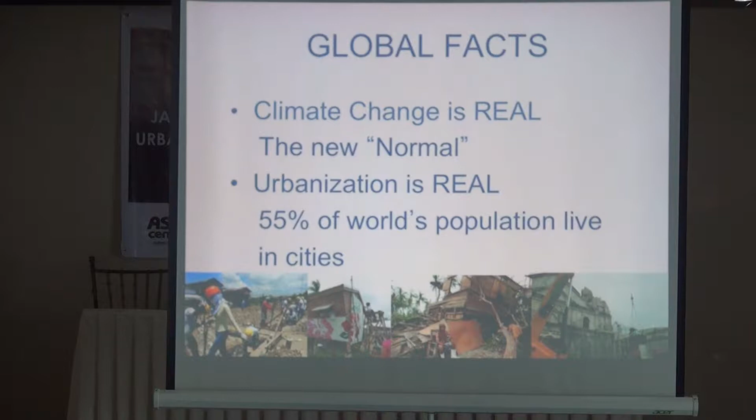What are the global facts? Climate change is real. This is the new normal, and we see all these disasters happening all over. Urbanization is real. 55% of the world's population is now living in cities. The Philippines achieved that value in 2008. Now the figure is 64% of our population living in cities, and that is very critical because we have barely any planning in cities. That's the problem.

What is the current thinking? To solve urbanization, we have to control densification. This is the key to a sustained future. I was glad Professor Bauer also mentioned this, to densify cities, compact cities. And then there's this triple bottom line: people, places, and profit. Before, businessmen always thought about profit, never about people and building places for people. Now the current thinking is building places for people, not only for business and profit.

What are the objectives of the Green Loop? First was to bring back legibility of the city by connecting major land uses. I'll show you a map later where these major land uses are—they already exist, and all we have to do is connect them. Similar to designing a house or building, like many of you here are architects, the building should be legible. When you go inside, you know exactly where the kitchen is, the living room, the bedrooms. It is legible. Similarly in cities, we have to make the city legible.

But how do we do that? Because of urbanization, Cebu is very different from Tacloban. The population is growing, the traffic is bad, there's flooding—there are a lot of urban problems now, but we are not addressing those problems. So this is one of the purposes of the Green Loop, to build back legibility.

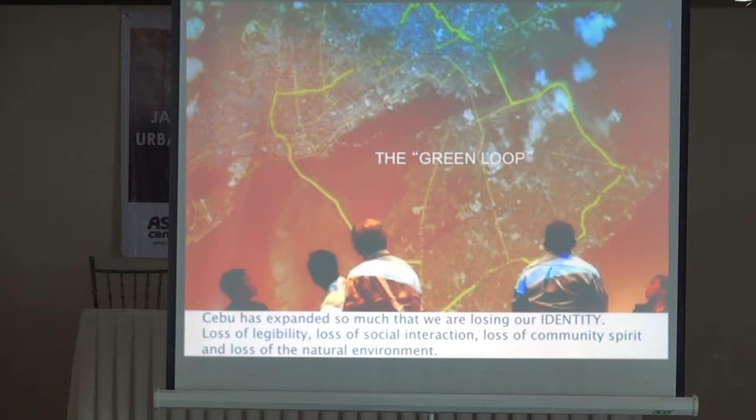So we are proposing a loop, but this loop is composed of segments, because you cannot walk all 42 kilometers of the loop. Instead there are packed segments, about 300 to 400 meters in length, that are connected along the loop and connect to major land uses along the city.

Now these are the rivers that we will pass: the Butuanon River in Mandaue, the Guadalupe River in the south in Cebu, and the Pilipog River in Cordoba and Lapu-Lapu. This Lapu-Lapu City in Mactan and Cordoba municipality in Mactan—the green loop passes through all of that.

What is important in this slide is we have the north-south arterial roads. As I said, development should be axial in Cebu, otherwise we will encroach on the mountain. So these roads are very important.

So we should designate—the problem with our roads is we designate them according to jurisdiction: city road, barangay road, national road. But in planning, that's absolutely useless, because we should identify our roads based on function.

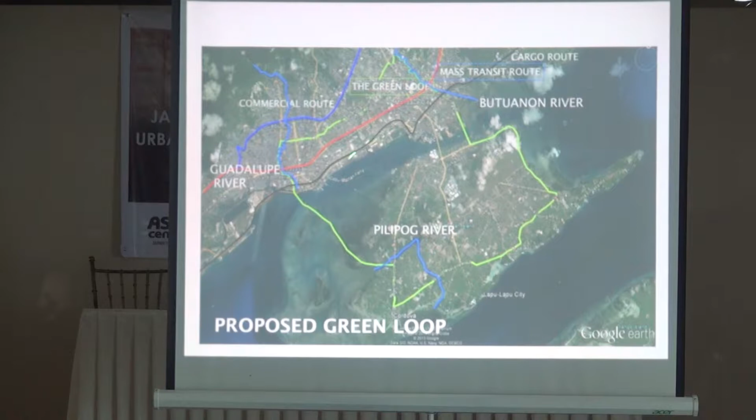If you look at this, the coastal road is the cargo route—that's its basic function, going through SRP to Mandaue. The red line should be a mass transit route, going all the way north to Bantayan and south to Santander. The blue line will be commercial and public, because a lot of subdivisions are along this route. And of course, the green line is the green loop, strategically located between the mass transit route and that private commercial route.

So these are the urban areas of Cebu, major land uses. Let me identify: this is the cultural and historic district where Santo Niño Cathedral and Plaza Independencia are, in Cebu City. Ayala Center and IT Park, if you're familiar, are becoming the trade and financial center of Cebu.

Mandaue's vision is high-end manufacturing, and we are proposing a design and creative hub, because Cebu cannot compete with areas like Calabarzon, which have very wide manufacturing areas. Cebu has the talent in creativity, so we try to introduce design and creativity.

University of San Carlos is in this area. The high-end manufacturing, like furniture, is in this area—a lot of home furnishings are being done here. So this becomes a high-end manufacturing area, which is the vision of Mandaue.

Lapu-Lapu is the tourist resort area, which still exists, and probably sports recreation. Finally, Cordoba—we want to preserve it for ecotourism and mangrove stands. It's important that we plant mangroves in this area.

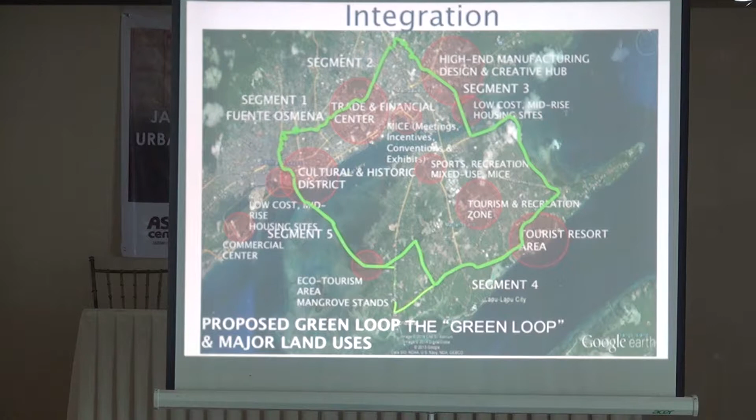Okay, so segment 1, I just talked about this in Cebu. We have this green loop around Mango Avenue area, and then this is the river, which is a linear park. And then it connects to the Cultural and Historic District. I told the cities, I was asked to talk about the green loop to the 4 cities, LGUs, and I told them they can make their own loops that connect to the green loop. So this is the heritage walk I am connecting.

So these are the 4 C's of livability: connected, compact, complete. But the bottom line in livability is the availability of choices - in terms of education, health, and of course mobility. So not only vehicles, but mass transit and pedestrianization, bike lanes and sidewalks.

So we have a lot of experience worldwide. This is the historic and cultural district. This is some model made by our SAFAD students for the historic district of Cebu. It's a loop from Colon Street here.

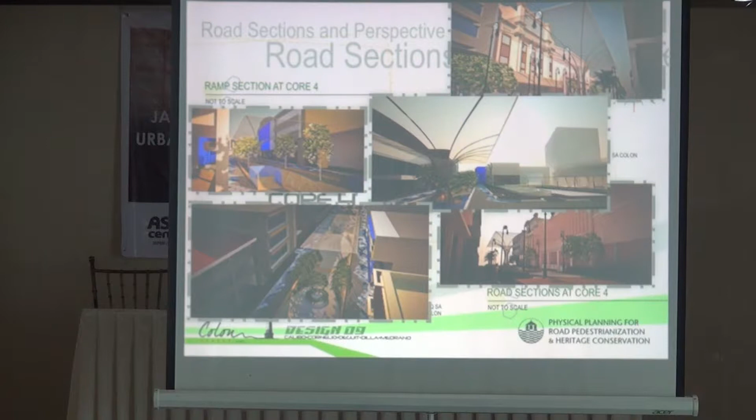The first street in the whole country is Colon, and now we are asked to pedestrianize Colon Street. And then those are the areas along the historic district of Cebu. That's the model where the mayor attended our presentation - that was actually in 2010 when he was still a new mayor. But it's only now that they're expanding to pedestrianization.

There are samples by our students - that's their perspective. And then these are the housing areas in the south of Cebu.

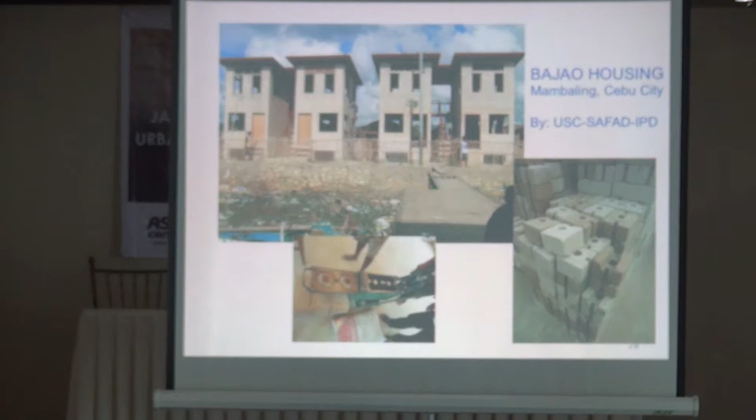This is Bajao housing made of compressed earth blocks, which I explained yesterday. And then this is the machine that we donated for the community, in the rural areas. This is in Bantayan up north. This is what we're doing.

This is in Lapu-Lapu. That is the proposed bridge to the Mactan area. We call it the Quincentennial Bridge - 500 years since the coming of Magellan in 2021, 6 years from now, but nobody is talking about it except us in the college. So why not build an iconic structure to commemorate the 500 years of the coming of the East and the West?

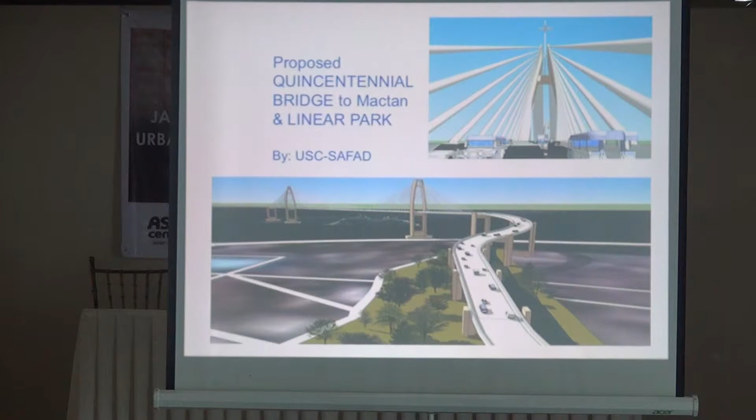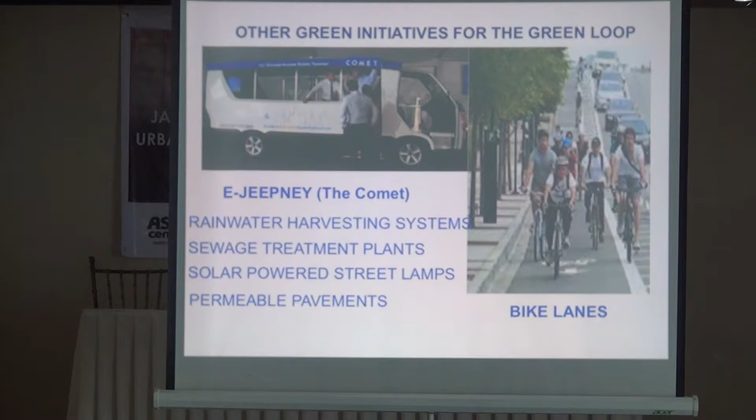Mass transit is the DOST road train - I wonder if you heard about it. And then the Japan AGT - Japan, the JICA, is proposing an AGT line from Mactan Airport to the city. So this can be another option.

And then this is important: 3 spheres of influence in the civic environment - government, private sector, and the community. Before, it used to be government and private sector working together, but now the community is very active. So all of this should come together.

That's the Mega Cebu vision. That's the Green Loop experiment we had last year. And then this is a slogan we are doing now, Cebu in 30 minutes. I hope it will bring back the identity of Cebu. So with that, thank you and good morning.

When you design a city for cars, it fails for everyone.

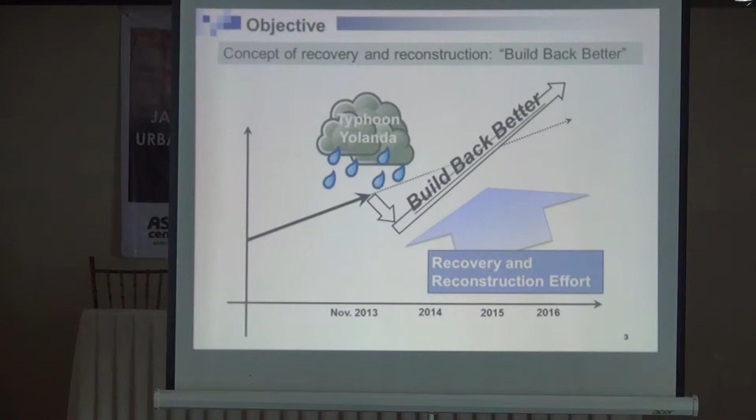This chart shows the approach of our project. To achieve Build Back Better, a comprehensive approach is very important. What is comprehensive approach? Firstly, we need to understand the current situation.

So we took the survey to understand the damage by structural storm surge and strong wind. Then we analyze the issues for recovery and reconstruction, and set a vision for the future and basic policies, discussing with Tacloban City and other LGUs.

Regarding the basic policy, we hold up 3 principles: building safer cities, recovery of people's daily life, as well as recovery of local economy. And then we support planning of comprehensive recovery and reconstruction so that GOP, Tacloban City and other LGUs can implement it.

For the comprehensive approach, we selected 2 focuses. One is to introduce our experience. Japan has much experience facing large-scale disasters like earthquakes and tsunamis as well as typhoons. So we introduced our experience in terms of not only technical aspects but also procedures.

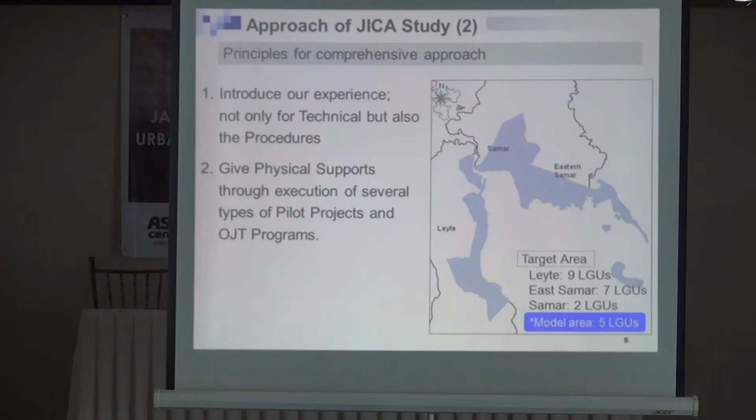Today, I want to focus on planning for building safer cities. In the afternoon, our member Mr. Uemura will explain technically about hazard maps, so I will skip this part. But hazard maps are very important to understand the hazard probability, inundation area, and inundation depth.

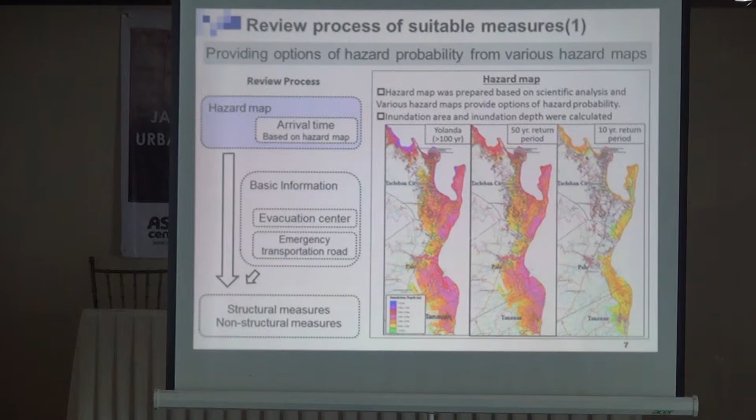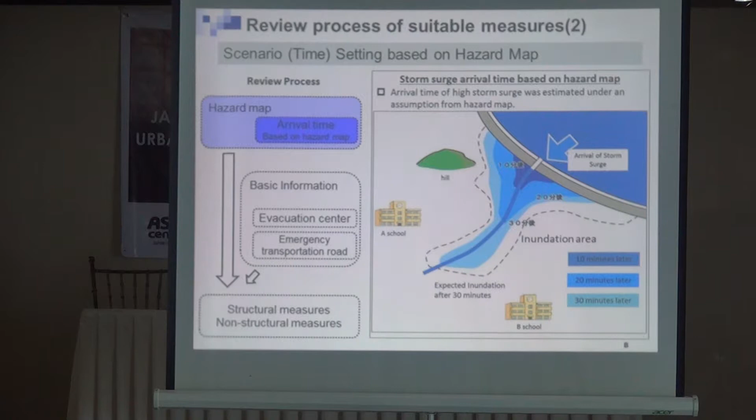Using this hazard map, we estimate the arrival time of high storm surge to each area. This information is especially important for evacuation. This is an example result of analysis of arrival time of storm surge, in the case of Basey municipality.

In this result, we can understand how many minutes people in this area have before being inundated, and how many minutes they have for evacuation.

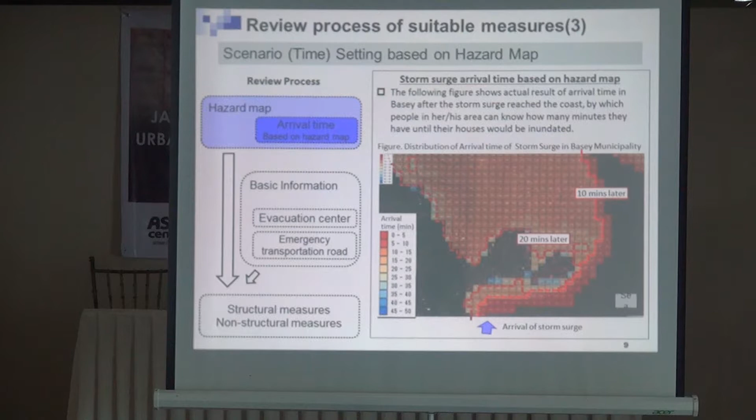Using the hazard map, we discussed and compared basic information like the evacuation center and emergency transportation road. Regarding evacuation centers, firstly we confirm the location. Some evacuation centers are in low risk areas, and some are in hazardous areas. If so, we need to think about changing the evacuation center for each barangay.

After that, we need to confirm the capacity of the evacuation center and the number of evacuees, the people who need to evacuate. This work is actually very tough and takes time. The LGU is still ongoing to get the information and data, and it's very hard to get enough capacity at evacuation centers for all residential people.

So we need to discuss using private buildings as evacuation centers, and this information should be updated and discussion should continue.

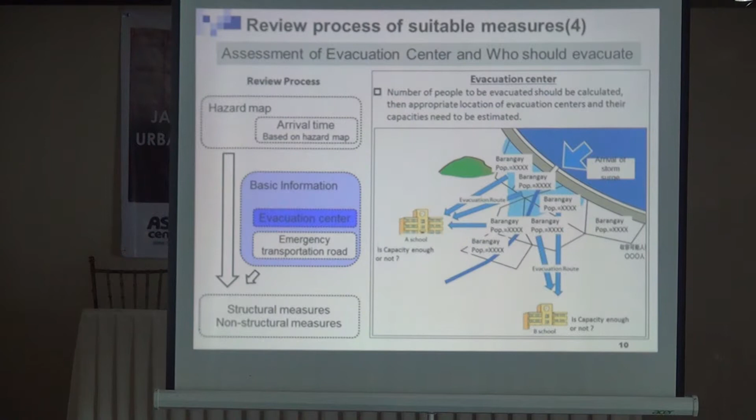The emergency transportation road also should be discussed. During disaster, if people try to evacuate using their vehicle, congestion happens. So in advance, we need to confirm the evacuation transportation route, and the capacity of the transportation should be considered. Also, communication and information dissemination about road damage is important.

And we need to prepare for after the disaster. We need to start road cleaning for access security.

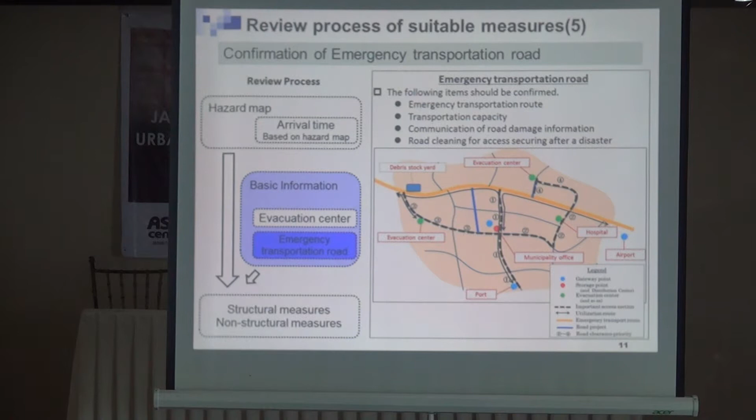So in our project, we held several workshops with LGUs. We discussed the evacuation plan, land use, and not only that, but also the social sector economy. Finally, we can discuss the structural measures and non-structural measures.

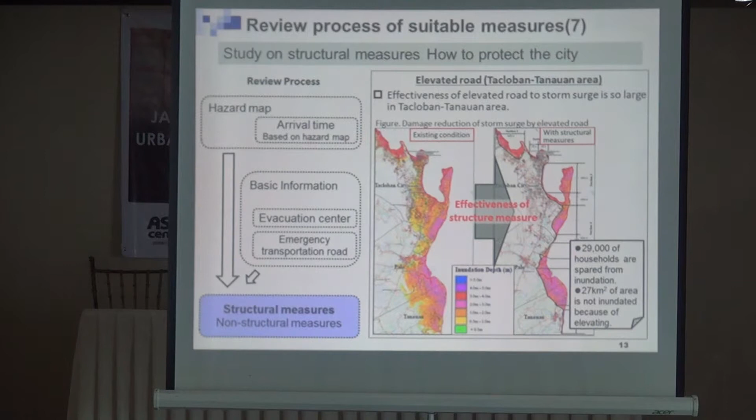Regarding the elevated road, Mr. Weber will explain in the afternoon, so I will skip that. But other kinds of structural measures are also important, for example improvement of the evacuation center and improvement of hills or high elevated areas for safety. The approach road to these areas is important, and the emergency transportation road should also be integrated.

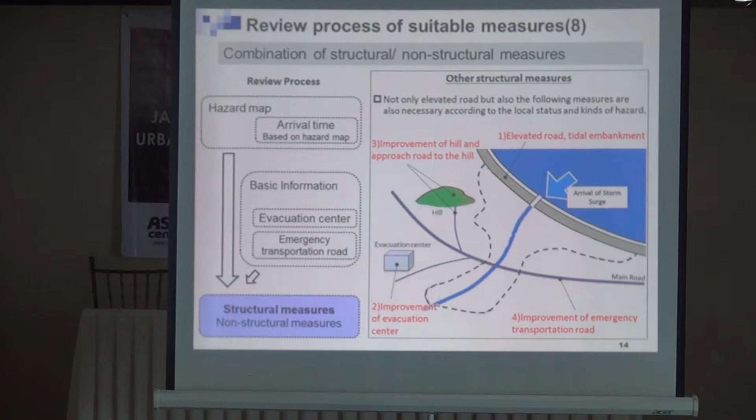Regarding non-structural measures, we have four items to consider. First, we need to avoid the risk, meaning we need to discuss relocation or easement. Also, we need to think about how we can mitigate the risk. For example, evacuation is very important for preparedness.

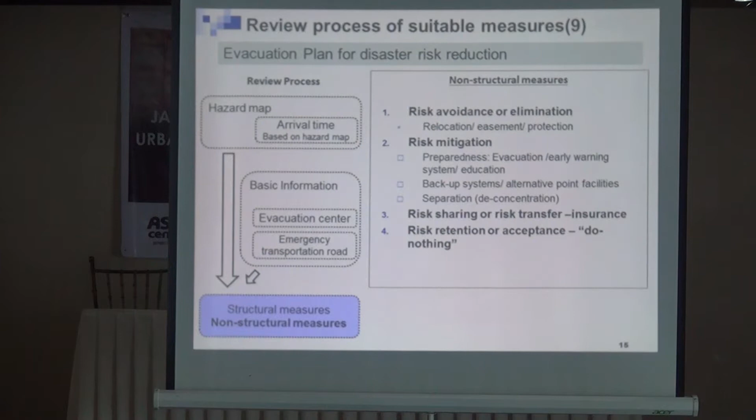Regarding the evacuation plan, this is an example. We did a workshop with the Guiuan planning officer so we could understand the location of each barangay and the safer areas. We confirmed the number of evacuees for each barangay and the capacity of the safer areas, then compared and discussed. It's actually difficult, as you can see, since the total number of evacuees is more than 2,000, but it's difficult to satisfy such capacity, so we need to find schools, churches, or private buildings.

So the actual situation in Guiuan is that the capacity of the evacuation centers is not enough. We need to continue our efforts to make a practical evacuation allocation plan.

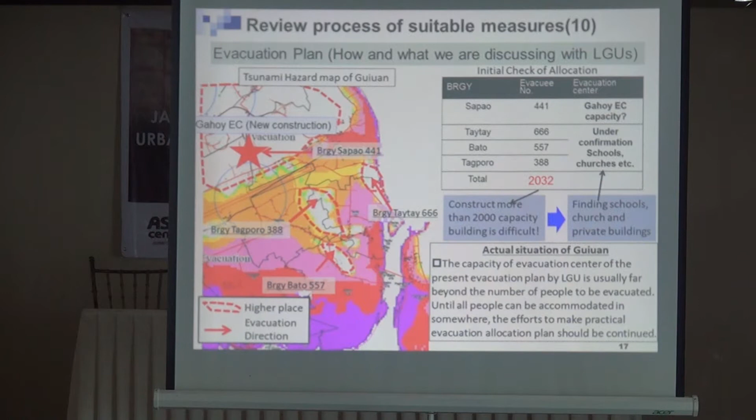We still continue to work together with the LGUs in late summer. So from April we start a new project, and I want to introduce something. To consider planning, we focus on the land use plan and also the LDRRM plan, the disaster risk reduction management plan.

For the land use plan, we are now discussing with Tacloban City and Palo for area management. Area management is important to enhance the land use, how we can use the land, and especially we support DPWH to construct the elevated road, so the risk of the area will change. It means some areas will be protected through structural measures, so we can think about how we can use the area after the building construction.

This is the case of Tacloban. We discussed with the planning officer of Tacloban and thought about the vision and goal, how we can use the land. Then we separated each zone and discussed further.

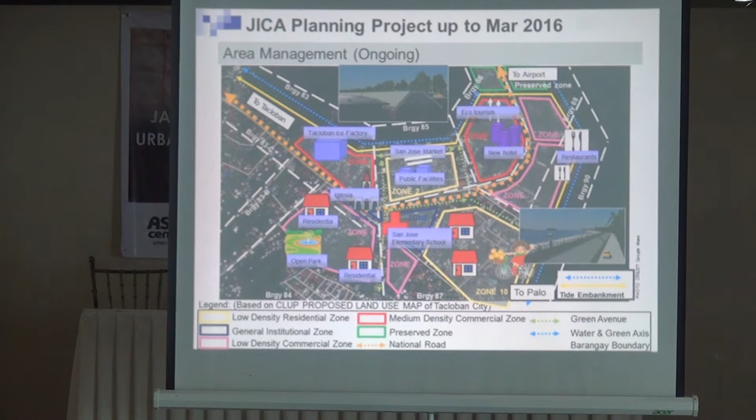The other one is the disaster risk management plan. We discussed with Tacloban City for a timeline action plan. This is just an example.

For the preparedness of disaster, there are three points. First is who will do what. In the Tacloban office there are several departments, so we need to decide the role of each department. After that, we need to think about when who will do it, so we plan to make the plan before 120 hours during the typhoon, and we discuss how we can do that. After that, we need to coordinate between the related organizations.

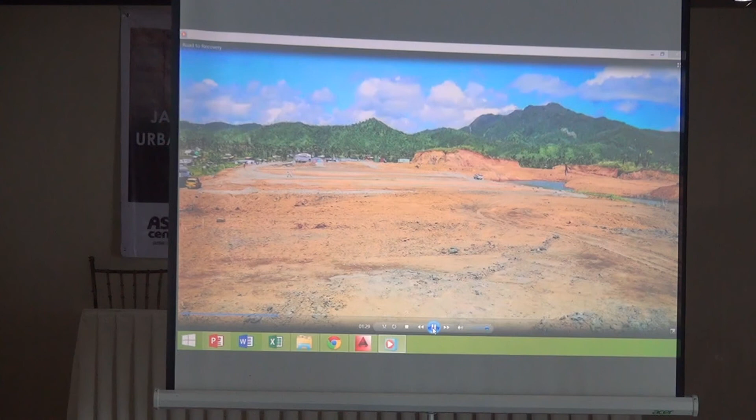18 months after Yolanda, however, only 123 permanent homes have been completed and occupied. 106 were built by GMA Kapuso Foundation and 17 by the National Housing Authority. Because the construction of permanent houses is taking a long time, it became necessary to build temporary houses that take only 10 days to build, but can last up to 10 years.

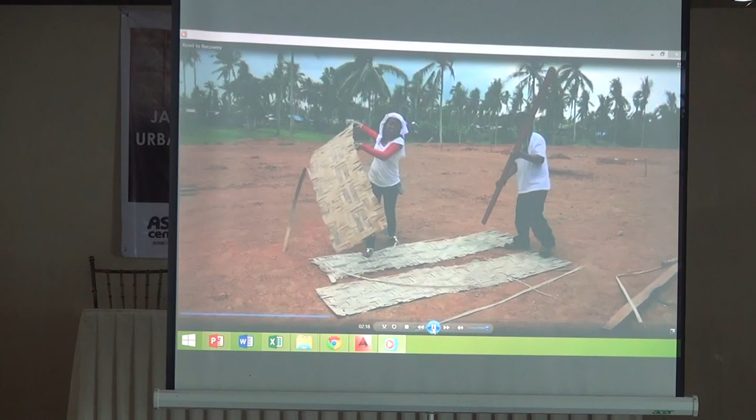Designed to be climate resilient, these shelters had in fact withstood Typhoon Ruby's high winds, which battered Tacloban for about 24 hours. The Tacloban city government, along with several partners, have collectively built 778 units of temporary shelters. City government employees celebrated the first Independence Day after Yolanda by helping build these temporary shelters. The target is a total of 2,200 units by the end of 2015.

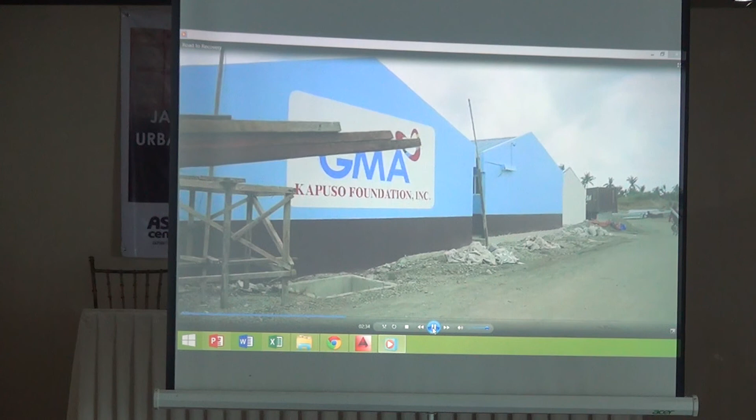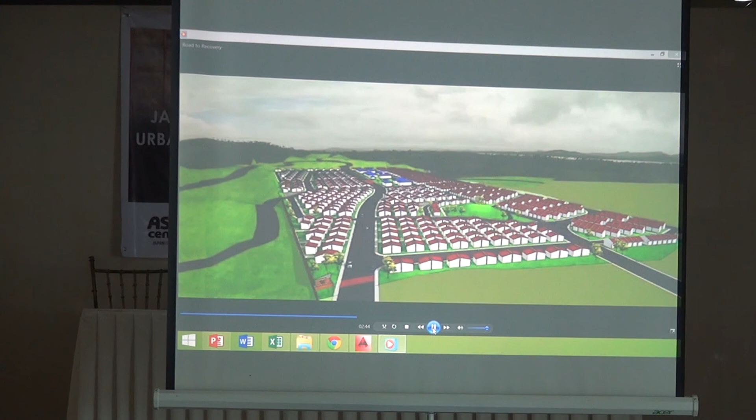One of the strategies to build back better is to build not just a relocation site, but a brand new township in Tacloban North, complete with schools, health facilities, public safety services, and even a satellite office of the City Hall. Tacloban North is now being master planned to become a highly desirable place to live and do business. It has the...